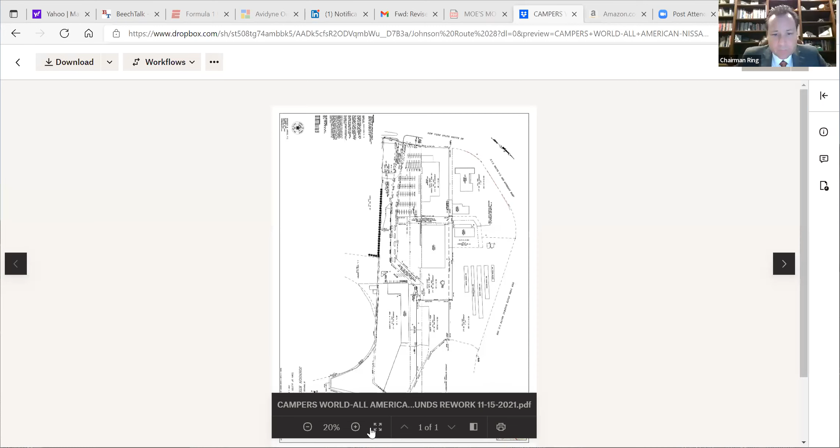Does this look like the latest? Yes, it is. Okay, let me zoom in here. So center of the screen, right where your mouse is, that's the Central Hudson building. You can see down a little bit is where the water tower is in the parking lot.

Yep, right there. Now, to the right of that, you see the dashed line is the lot line that's going to be deleted, and then there's a new lot line just a little bit to the right of that, which is actually about 26 feet over.

And Paul, what's this distance between the one-story commercial building and the lot line? Is there sufficient distance here? Yes, I don't have the exact number, but we did review and discuss that. I believe in the OM district it's a minimal setback, as I recall. I forget the exact number.

What setback are we calling that, Paul? I guess it would be a rear yard on the storage facility. Jeffrey, if you could scroll to the right a little bit, show us that lot 2. Well, your rear or side are the same. Okay, so we know it's not the front. Correct, so rear or side is 10 feet. So yeah, okay.

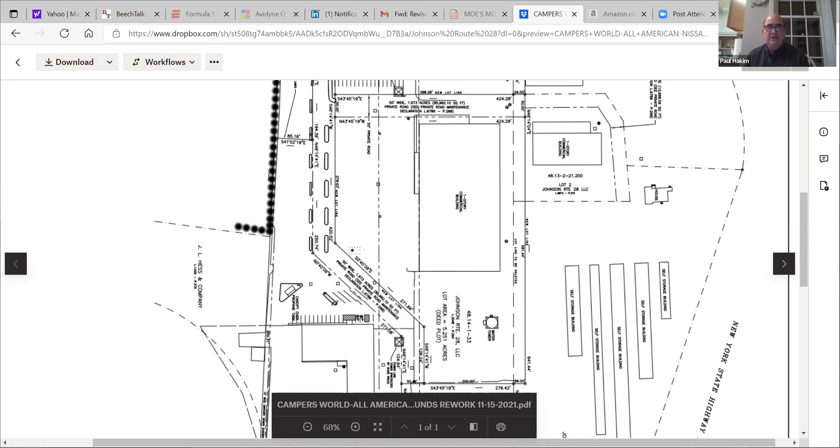So I believe that dimension was 15 or 16 feet. Now for reference, if you look up in the top corner, you can see we are moving the lot line about 26 feet. If you zoom in a little bit more, using that as scale for reference. But as I recall, when we were in Brinnier and Larios, it was about 15 feet. This is the 26 feet you're talking about? Yeah, correct, okay, so that'll give you the scale.

I'd like to make a motion to open the public hearing. I'll second that. All in favor? Aye. Against? Larry, wake up.

If there are any members of the public who would like to inquire on this project or have any questions related to it, please unmute your line and give a comment.

I make a motion that we close the public hearing. I'll second. All in favor? Aye. Against? Motion carried.

David, can you read the resolution? Whereas the applicant Johnson Route 28 is seeking minor subdivision / lot line revision approval to shift the lot line on 3 contiguous parcels in accordance with section 161-10 of the town code.

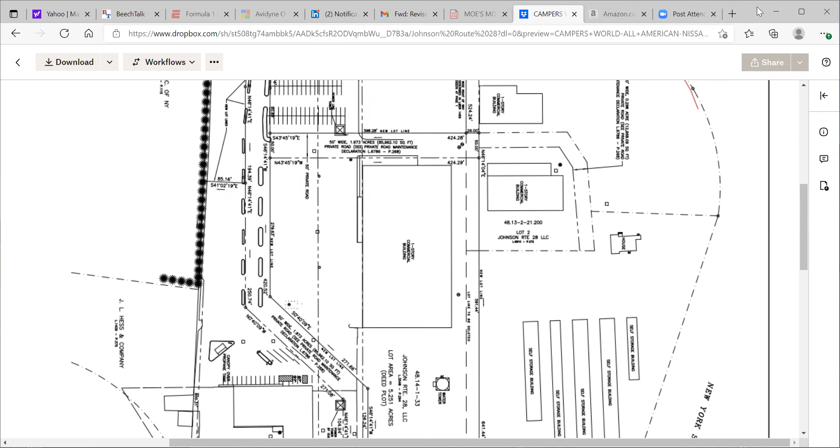I'm sorry, Chairman, I hit my unmute button at the last second. I apologize, I was in favor. Motion carried. Paul, thanks for your time.

Okay, thank you all. Thank you. Happy New Year. Thank you. Paul, you're all done with this now? Yes, we are 100% done, I'm hoping.

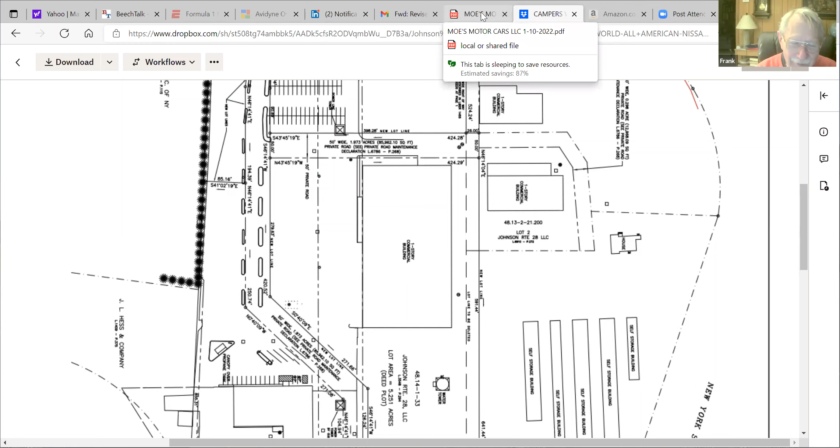Taking a long time. Yes, it has. It's been about 10 years I've been working on this cleanup. Wow. But we're almost there. Thank you very much, appreciate your help. All right, Paul, thanks.

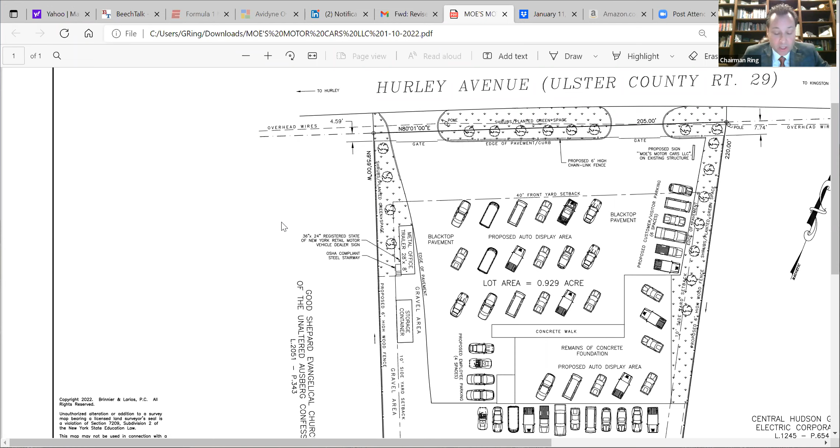The next order of business is Moe's Motor Cars. This item has been a topic of a number of different boards over the last few months. The applicant, Mo Waheed, is here tonight. He has prepared a professionally designed site plan and would like to take us through it. Mo, if you could talk us through the facts of your final proposal, that would be great. Sure, okay, so just a little change that I made was the fence on the roadway.

I brought the fence back from the line to the edge of the pavement to allow for the shrubbery to cover it up on my own property, so I don't need permission from the roadway.

I moved the trailer too. So you moved the fence 7.74 feet on the right side and 4.59 feet on the left side from the property line. Yeah, it's more than 4.59 - that's only at the edge. Towards the middle it's at least 6 feet, and when it starts hitting the island it's about 8 feet.

And you also had a conversation with the county roadway about the curb cuts, right? Yeah, I spoke to him. The representative came down immediately, checked out the site, and made recommendations to push the gate and the chain link fence to the edge of the pavement. He said if I did that, there'd be no problem. I forwarded you the email. So I did it immediately - I addressed it. It's no problem to me.

I moved the trailer more now to the church side, closer to that area, which actually hides that trailer a little more, so it's more of an open area in the front. People had issues with the trailer even though I'm going to paint it and clean it up - it's going to be more hidden on the side, same side as the container that has graffiti, which is also going to be all painted up.

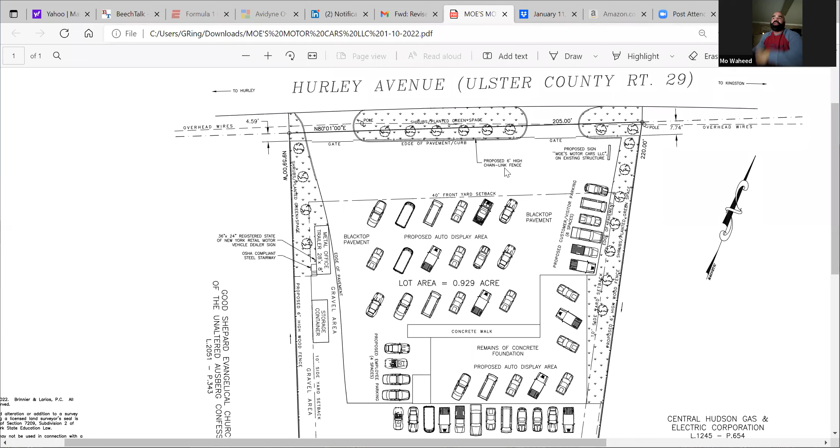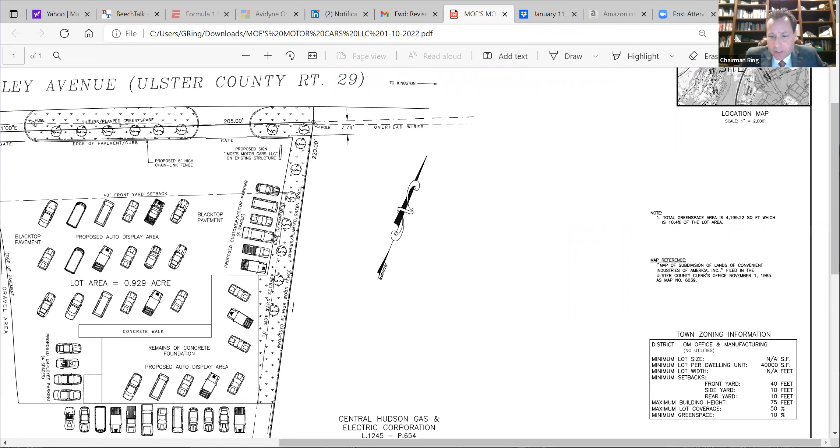That's pretty much it. Do you have any questions on anything you were concerned with? I think you identified that there's 10% required green space, and I see a note here on the drawing that the total green space is over the required 10%. Correct. Okay.

Is there any discussion among the board for this applicant? I have a question - Mo, can we talk about the water? Will you be having any bathrooms on the property? No, I mentioned that, no bathroom. You would not be connecting to the water system at all? Absolutely not. In the future, if I build a building that's a different story, but I'm not - so in the near future I don't see that.

What's the parking surface? In the rear and the front is asphalt, that's the majority of the property. The rear is going to have big piles of blacktop asphalt millings, mashed down so it'll look pretty much like asphalt back there. The way we mash it down, it's close to gravel, but it's more like a blacktop/gravel mix.

Jeffrey, the board got a memo, but it predates the most recent site plan, so I think he's taken care of everything. I just have two questions. One's probably for Warren - does he need one ADA compliant space?

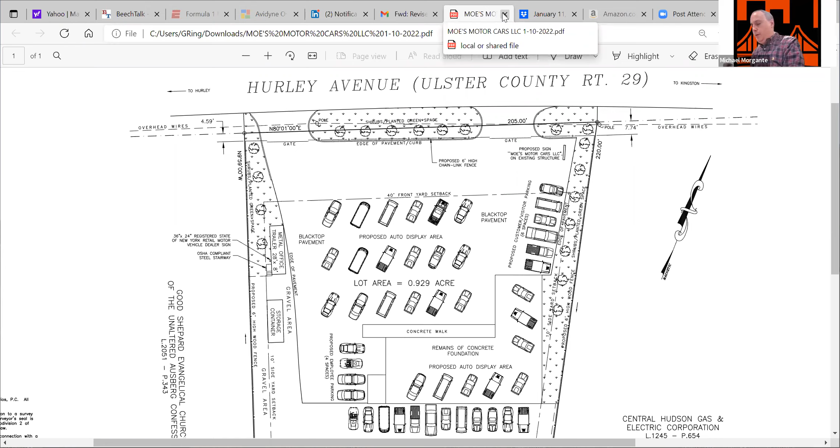All right, the next order of business is Woods Road Solar Farm. Michael, I believe you're on for that. I am, Mr. Chairman. My name is Michael Morgante, I'm the project engineer for this solar farm application before the board. If you would like, I can give a brief presentation of the project. Yes, and I've got your project pulled up. There's really two pieces to this project, as we discussed in the workshop. The first piece is to combine the lots together, and the second piece is the project itself. So if you could describe the project in those two pieces, that would be great.

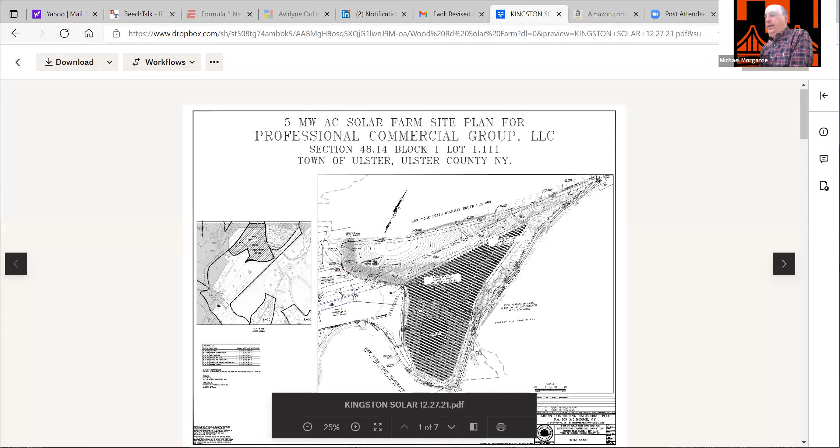Sure. Just slightly to the left of where your mouse pointer currently is on the screen is approximately the lot line that's to be removed on the project. Actually, Mr. Chairman, if you can go to sheet 3 or 4 of the site plan, it would be a larger view for us. That one works just fine, right there.

So again, just about where your mouse is hovering, just up and to the left a little bit, is where the existing lot line is to be deleted. And what we're proposing here is a 5 megawatt solar farm.

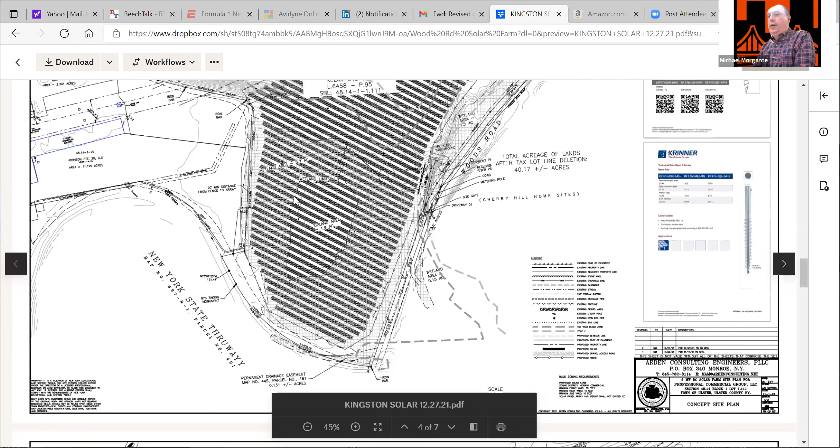The topography on the site generally descends in a southeasterly direction. If you scroll down to the center of the page, you'll see there's a wetland located in the southeastern portion of the site, with a small upland area of about 1.9 acres. The drainage from the site, at this low point, ultimately leads through box culverts and other culverts underneath the New York State Thruway, Route 87.

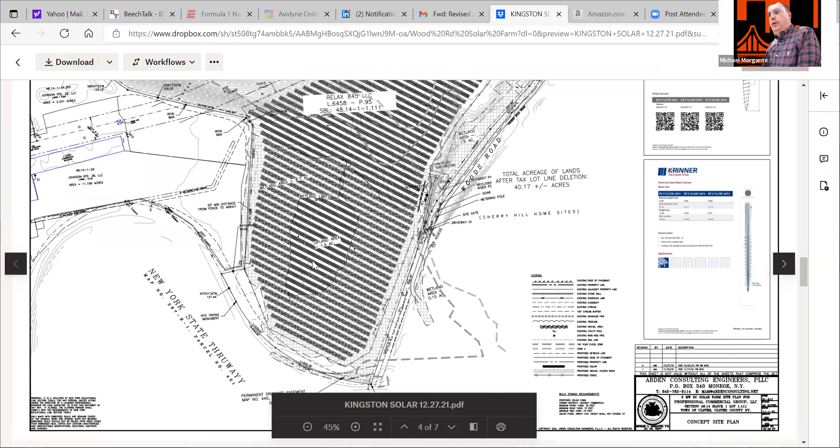What you can see, if you scroll back up a little, is that we're proposing the solar panel arrays just to the east of the Central Hudson Gas and Electric easement, bounded by Woods Road on the right-hand side of the page, to the east. The site would sit fairly low in topography.

It's surrounded by a lot of commercial properties. There is a residential subdivision, I think it's Magic Road, just slightly to the northeast, but they sit at a much higher elevation than us, and this site is pretty much buried at a low point in the area. So I don't think the visibility or aesthetics of this project would be an issue. If there ever was a poster child for a solar farm site, you're looking at it right now. Outside of this use, the site isn't really applicable for many other uses that I can think of.

So we would have an access road at the center of the page, accessed off of Woods Road. We would have some electrical pads just to the left-hand side of that. There's very little disturbance involved with solar farms, other than the helical screw piles we would utilize to insert these solar panel arrays into the ground.

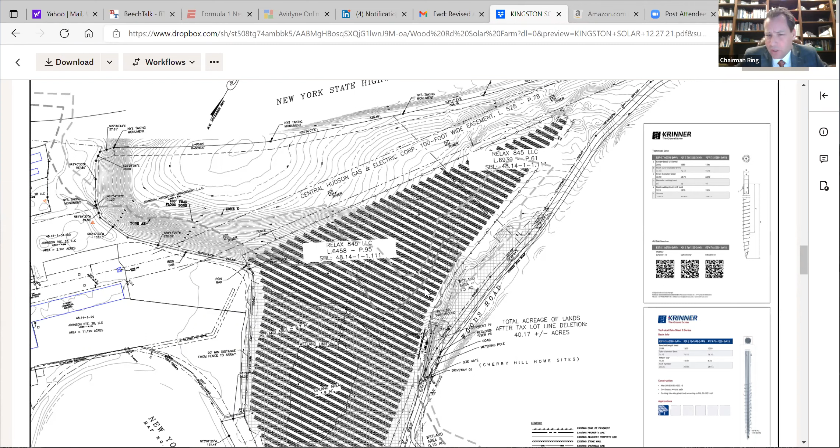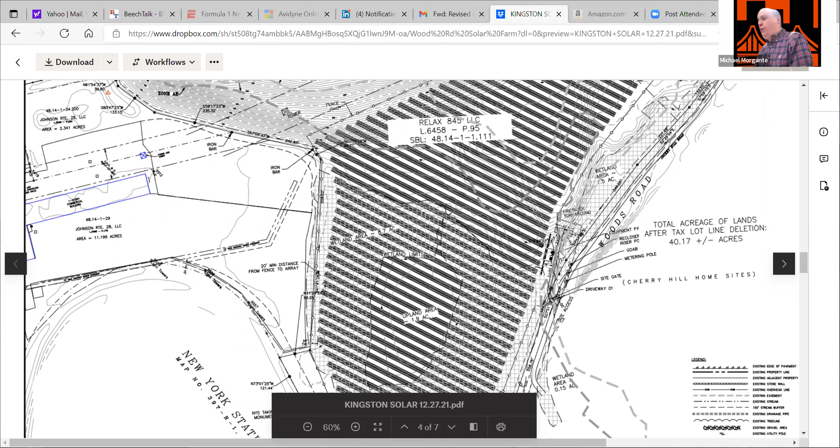That width, I think, is somewhere around 25 feet, if I recall correctly. If you could zoom in a little more, it may be a 20 or 25 foot wide easement—I want to say 20 feet. But if 25 feet is required, we can work with the town. Typically for water and sewer easements, especially for smaller pipe, a 20 foot wide easement is usually sufficient. Yep, that's fine.

Those were the comments I remember from the workshop. Correct, and those are shown on the plans.

Any questions from the board?

What's the life expectancy of these solar panels? So what I'm hearing is around 25 years. I don't think there have been any solar farms in operation that long yet, at least not in New York or the Northeast region, but that's my understanding. The technology can support about a 25-year life expectancy.

Mike, it's Keith Leibold, if I could. Yeah, the life expectancy is 25 years. What normally happens is these are financed on a 20-year curve, and at the end of year 20, the plan is they begin updating the panels with whatever newer models are available. A lot of municipalities have a bond for removal of the system after its life expectancy, but the racking is just an aluminum grid. So the expectation is they'd run their finance life, then through O&M start to replace these with, I'm assuming, higher power panels, which would lower the disturbance area while still producing the same amount of power.

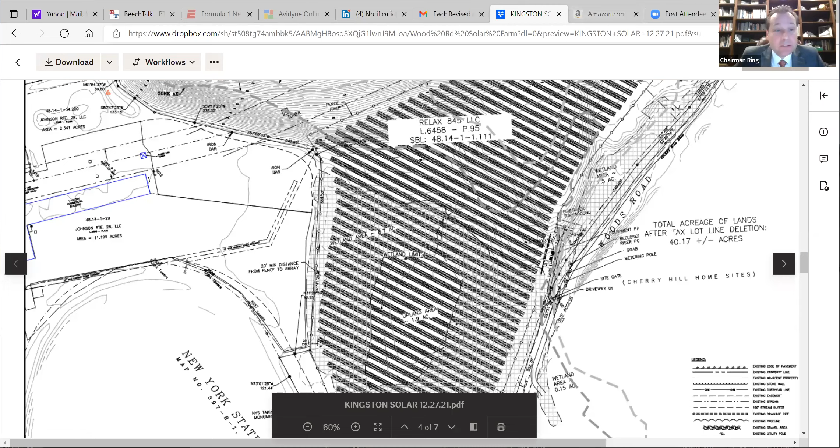All right, let me zoom in here.

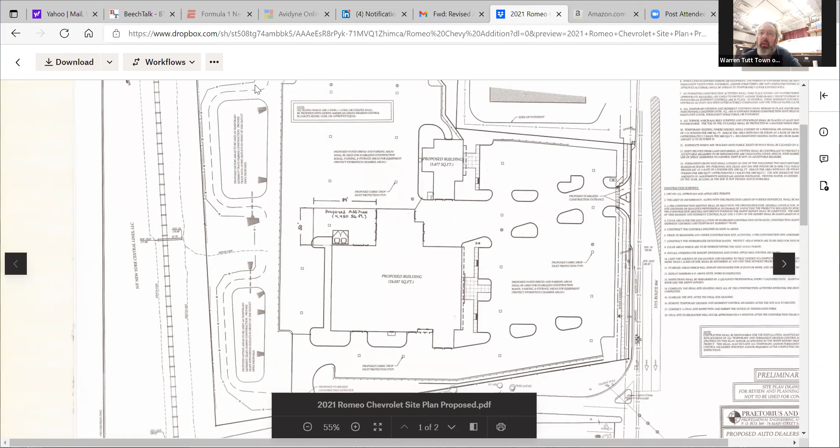Maybe a movement of a dumpster as well? Yeah, this is their second meeting. We saw it last month, and had to send it to county for comment. So the dumpsters are going to move to the northwest portion of the parking lot, up there towards the top. I think it shows up on the other page where the parking is, but yeah, in that vicinity. So that we don't have interference with the traffic pattern for the garbage truck. So pretty straightforward.

There's no need to modify the SWPPP since it's already impervious surface as being a parking area, so that doesn't change. And like you said, they'll move the grease separator from there to the adjacent driveway lane. That's pretty much it.

Any questions from the board on this? Nope. David, can you read the resolution?

Sure, it's a resolution closing SEQR and granting conditional site plan approval. Whereas the applicant Romeo Chevrolet seeks site plan approval for a 4,450 square foot addition to the northwest portion of their existing facility. Whereas the applicant has submitted a complete site plan application to the town, whereas the application documentation included complete application for site plan amendment review, two maps, a proposed site plan and a proposed erosion plan, prepared by Praetorius and Conrad, a signed owner consent form, a signed escrow agreement, and a complete short environmental assessment form. Whereas the town board, in coordination with the planning board, declared its intent to be lead agency and previously typed the action as unlisted under SEQR.

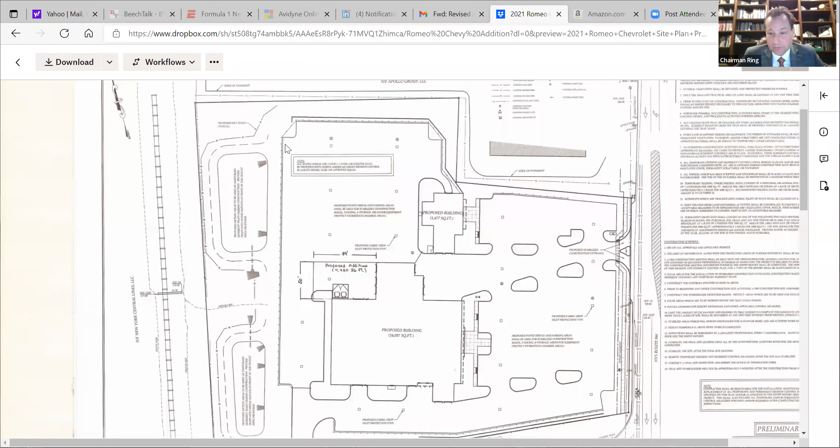Thank you, we'll see you in February. I hope so. Be safe, stay warm. All right, definitely. You guys, be safe. Good night, all.